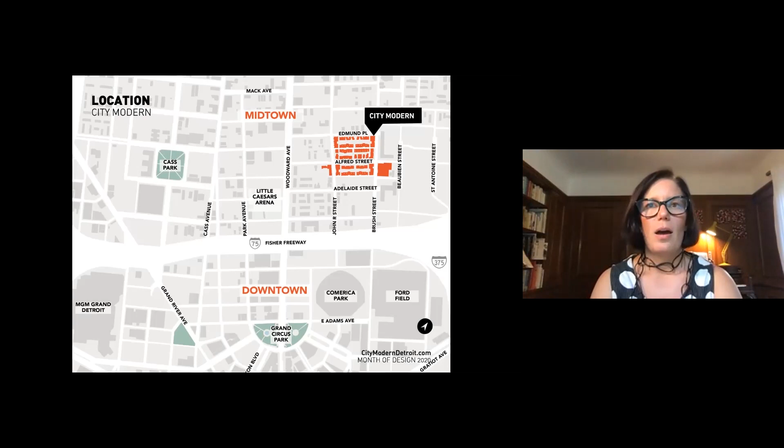Next slide, please. The 8.4 acres had 4 existing historic Victorian homes on them. But the historic Brush Park neighborhood is a well-known historic district that at one point had over 100 Victorian homes in it. It's now down to about 40 Victorian homes.

It was important for us, as we were thinking about how to design and construct new buildings within that neighborhood, to ask: what does it mean to design new buildings within a historic district? Next slide, please. When Bedrock was answering the RFP, we looked at everything, including what it means to design within the Secretary of Interior standards: the work shall be different from the old, but shall be compatible with the historic buildings in the neighborhood.

Next slide, please. We did additional research and looked at what that meant in order to do new buildings that were either fully contextual with the buildings around it, abstractly contextual, or anti-contextual. That ranges from everything from mimicking the historic all the way to doing something so unlike the historic, and anywhere in between.

Next slide, please. We also looked at the Brush Park Historic District. They had spent a lot of time putting together a really thoughtful document that outlined the 18 elements of design for architecture and for new buildings to be put into the historic district.

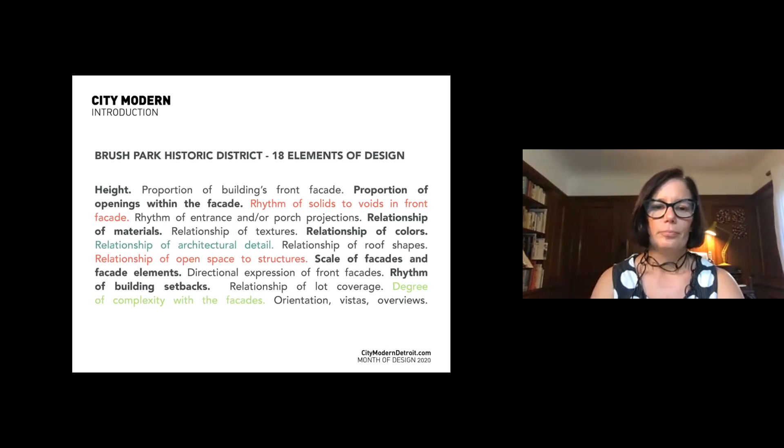Next slide, please. So for us, for Bedrock, with one of our very first new construction development projects, we had to think about what it means to design new buildings within a historic district in Detroit in 2016.

Next slide. We looked at the timelines of historic Brush Park: when the buildings were built, when they were divided up into smaller buildings, the storied history of some of the demolitions of those historic buildings. But we also looked at Detroit and the significance of design within the city over the past 100 years, running in tandem with Brush Park's timeline.

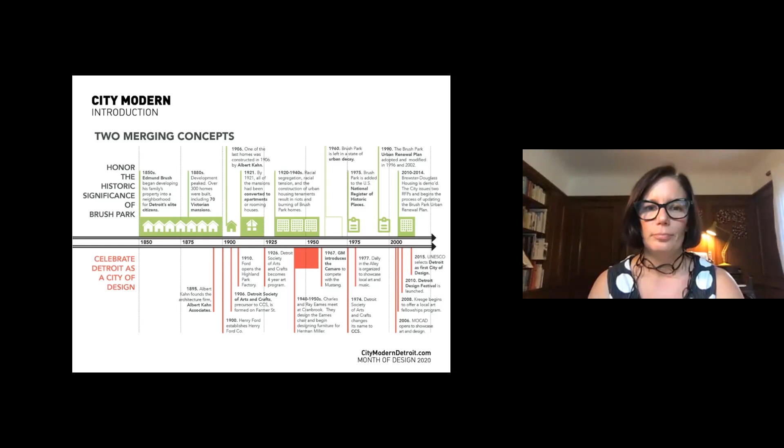Next slide, please. And then we realized we were at a moment, we are here in 2016, so that's almost 5 years ago now. We realized we needed to both honor the historic significance of Brush Park. Next slide.

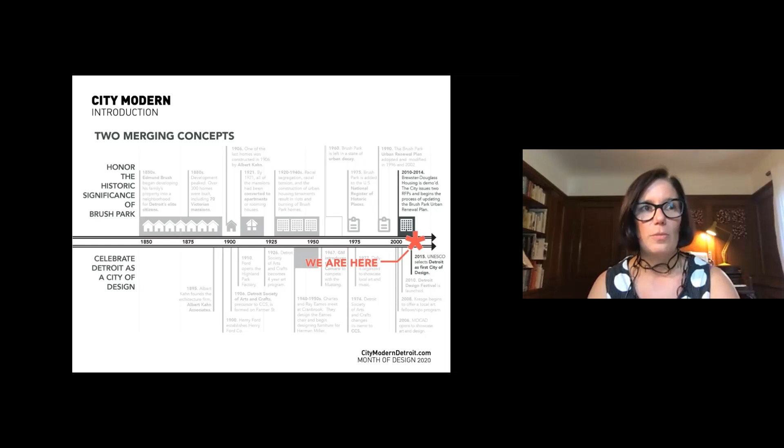While also honoring what design means to Detroit, our project approach celebrates Brush Park's past while designing contemporary architecture emblematic of Detroit's time.

With that approach, we realized we needed to hire the best master planners, so we hired Hamilton Anderson, a local architecture firm represented here tonight, and Betsy Williams is going to speak about their work on this project.

We knew we were going to have 5 different typologies within the project, so we looked for the 5 best designers, some of whom are here tonight, to talk about their projects. It was important that we found designers who had done similar work, designing new contemporary architecture within historic districts.

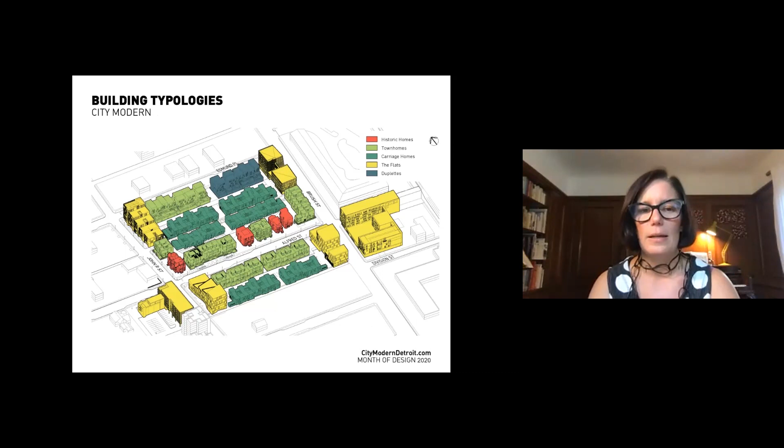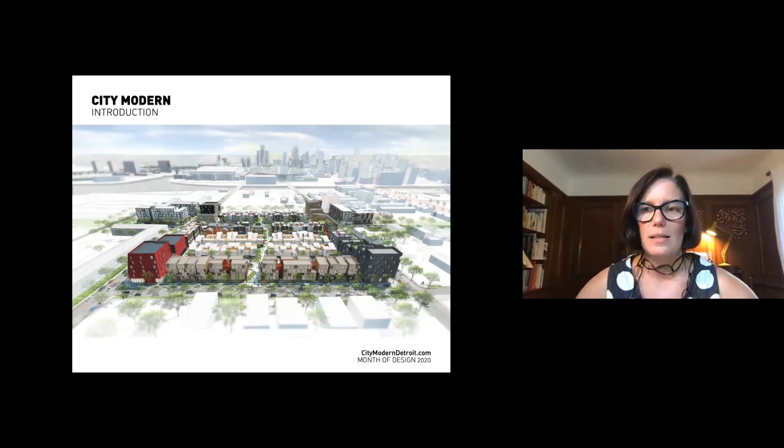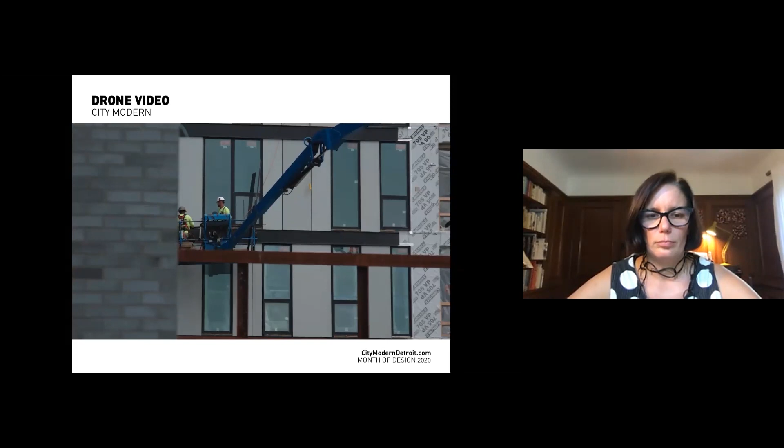This is a video that gives you a real-time look at the construction efforts of our project out at City Modern.

Tonight we're going to focus on an explanation of the planning process that we went through, and also 3 buildings that are currently under construction or about to open or have opened in the City Modern project.

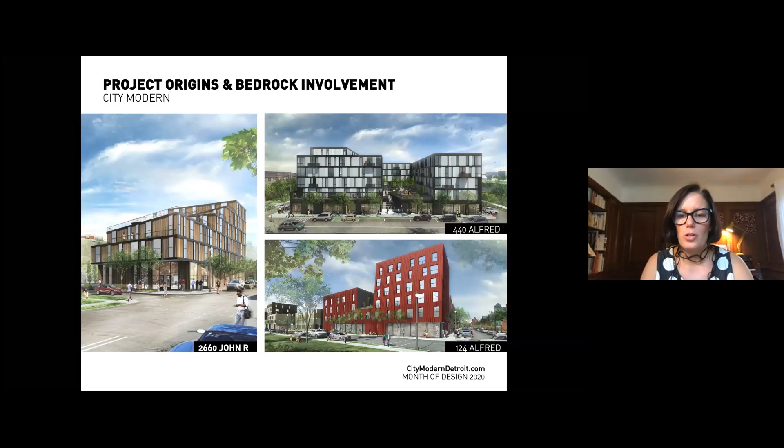We also have a community aspect here with one of our near and dear friends, Mona Ross Gardner. She is the chair of Brush Park Community Development, and she's going to talk about the community engagement aspect of our City Modern project over the past 4 years.

We also have Maurice Cox. We truly miss him in Detroit. He used to be our director of planning and development at the City of Detroit, has now moved on to do great things in Chicago, but was instrumental in getting this project off the ground and almost fully constructed.

We also have Betsy Williams, Director of Design from Hamilton Anderson Associates, and she's going to speak about one of the projects and one of the buildings here within the City Modern development.

And then we have Lorcan O'Herlihy, who's joining us from California today. Lorcan and his firm, LOHA, designed 4 of the apartment buildings within the City Modern project.

And then we have Andrew Bodley, a former associate at Hamilton Anderson, who was instrumental in designing one of the buildings there and now works at Bedrock as a senior project designer. So these are all your panelists.

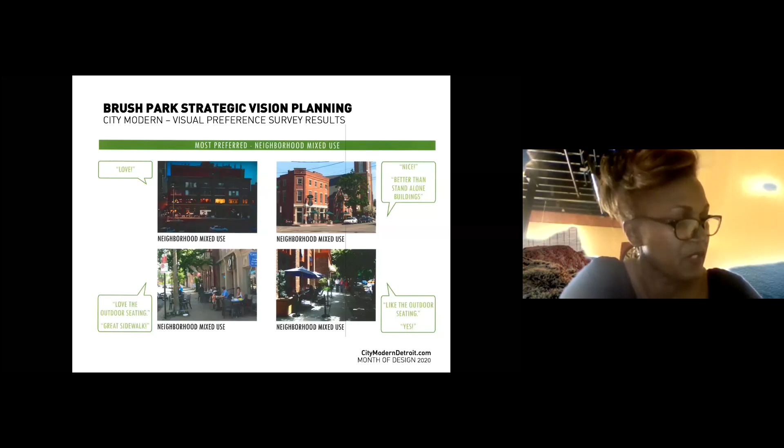When we started looking for another avenue of development for our community, we discovered that the density for Brush Park would only allow for 15 to 35 dwellings per acre. We decided to approach the city, along with Sue Mosey in Midtown who assisted us with this project, to see if we could get the development and modification plan changed to increase the density per acre to at least 60.

I was actually allowed to sit on a panel when the city put out an RFP to find a developer for the project for Brush Park. That's when I met Bedrock, and this young, interesting group of talented architects came marching in. Although there were 9 different groups we had to choose from, they just stood out. I'm so proud that I was part of that project to help bring them into our community, because we've had nothing but success.

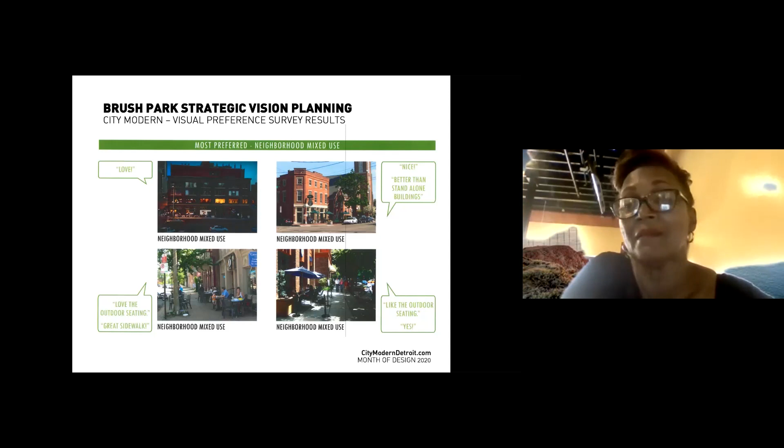We have sat down and became friends. They've been at all of our meetings, they've listened to our concerns, they looked at what we like to see in our community, and by golly, it's happening. It's actually happening. So I want to thank Bedrock for that.

So you can learn more about the Brush Park CDC by visiting our website, www.brushparkcdc.org. The CDC generally meets bi-monthly, so you can visit our website for updates, or reach out to us at hello@brushparkcdc.org. I really do thank the panel for putting this together and allowing community input into it.

They worked very closely with us throughout this whole process. We have been informed of every aspect. We've been invited to all the meetings and been able to participate as they have with us. So I just want to thank you from the Brush Park community and the Brush Park CDC.

Well, Mona, I want to thank you for taking us into your home, which you did by inviting us over for meetings, but also just accepting us into your community. We know as a developer that this community already existed, that the people already lived here and had a strong voice, and we just want to make sure that we are good neighbors and long-term stakeholders as we go into the future.

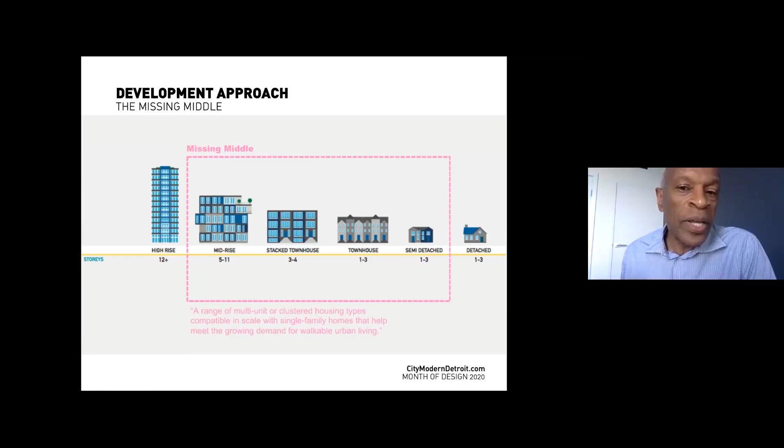The other issue was how do you build a gentle density beyond the single-family tradition that Detroit is known for, and not have the neighborhood populated by high-rise typologies that often scoop up all of the residential power that would otherwise animate the street life. So we were in search of the missing middle—those mid-rise buildings, stacked townhouses, carriage houses—that could genuinely build the neighborhood over time.

And then, how do you do that where you set out a set of guideline instructions for a variety of architects to come in and design singular buildings? So it already introduced the idea of a code of sorts that would be creatively interpreted by a variety of architects in this block and a half.

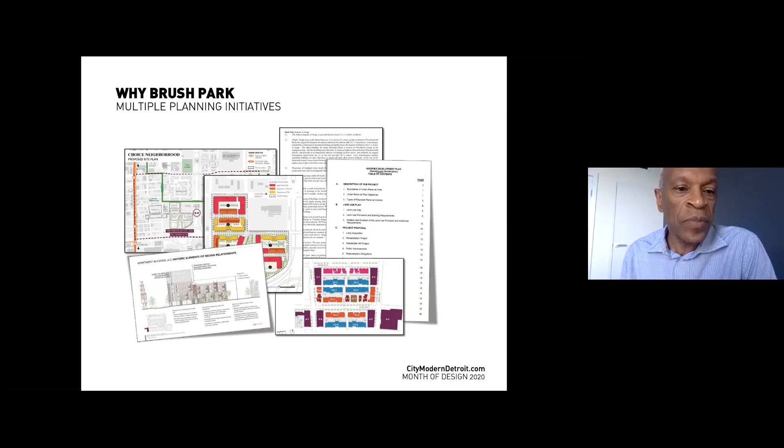There are only 1,900 plus residents today, but we were envisioning what a quarter square mile of Brush Park might look like well into the future. What happens when you invest in a transit system that is literally 5 minutes away from this neighborhood? Does that give it an opportunity to be a transit-oriented development, just like that? Could you conceive of a neighborhood where you would be able to walk within 20 minutes and access all of the amenities that you needed in your daily life, from walking to work, to walking to the corner store, to riding your bike along a greenway, and so on? So the 20-minute neighborhood—my conception of it was born through this City Modern project.

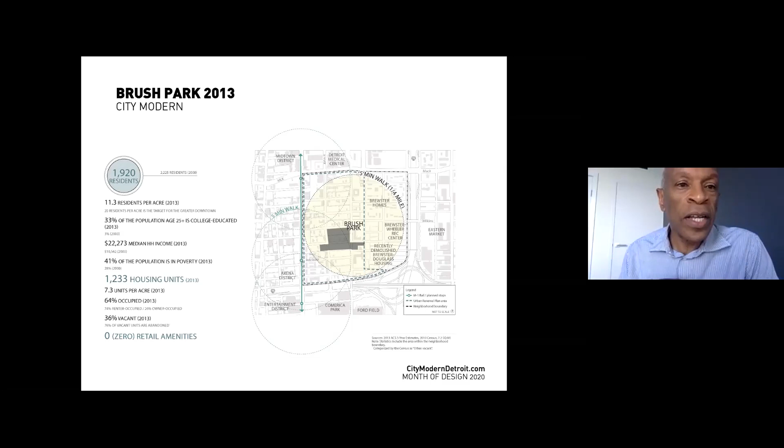And here was the other thing: could we design a neighborhood that was socially, economically, and environmentally integrated, that would be attractive for young families with children, young singles, elderly, and young professionals? Could we really create a mix of units and types that would attract this broadest cross-section of demographics?

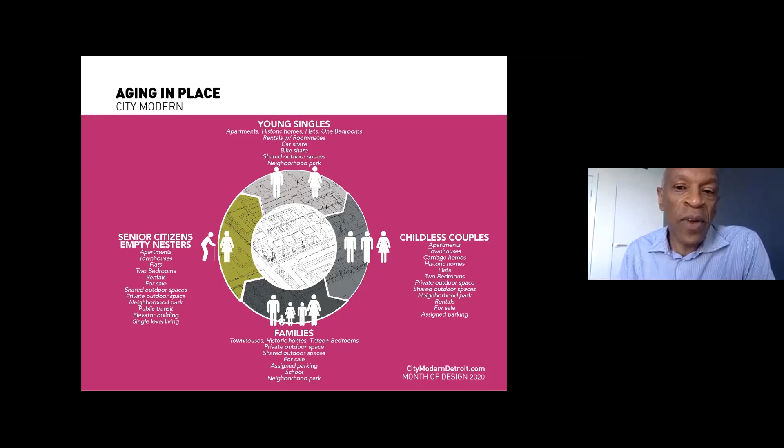Could we build a neighborhood that wasn't dominated by parking lots, but instead allowed the buildings to have a relationship with the street? So you have that traditional eyes on the street, you create porch life, you create balcony life where residents can literally lean over and see who's ringing their doorbell. This attention to the quality and the life of the street was a foundational framework.

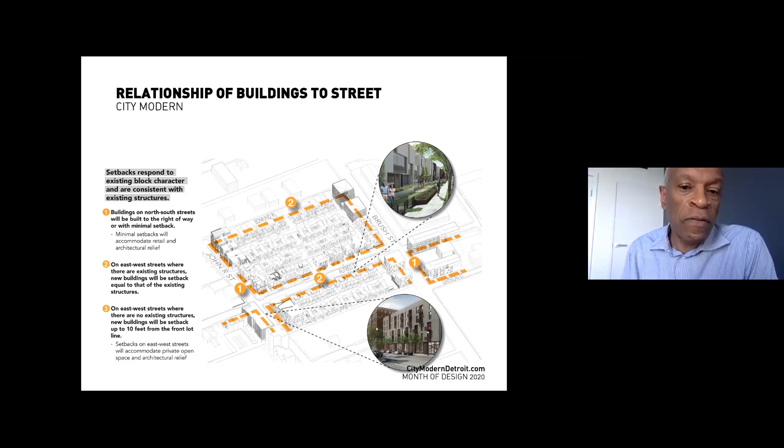And I think, as Mona mentioned, the engagement was continual, and it was the anchor for the success that we see today. I'm not talking about some obligated public hearing, touching base once a month—this was a deep engagement and continual feedback on the design, the form, the typology. It's a lesson to developers that if you want to design a community that feels like the community, you have to engage in a deep process. And that actually could not have been done without the CDC having already firmly been in place, having already put out a vision for what they wanted to see—that gentle density that Mona talked about.

And then, how do you create a cross-section of types, and where would you put appropriate mid-rise density? The decision to orient them north-south and reserve the smaller scale development to the east-west streets is something that is fundamental to the success of Brush Park. I'm pretty confident that all of you have stood between these 6-story buildings and looked at how they frame the downtown high-rises, and you have an instant sense of urbanity and variety.

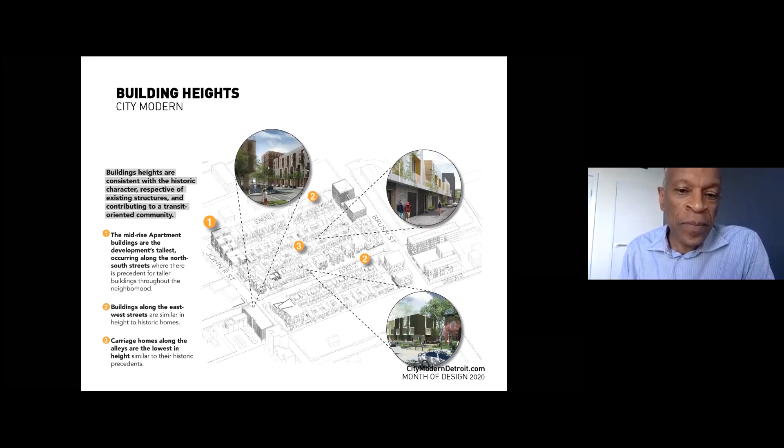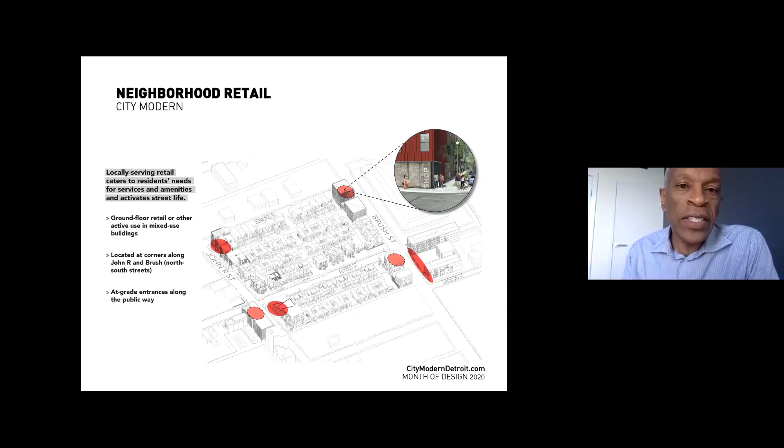And then this notion of the corner store: could we cluster just the right amount of retail on the corner, the way retail has traditionally nestled itself into predominantly residential neighborhoods, that again animates the street life and creates this 20-minute neighborhood where you can get your amenities within the neighborhood you live.

And this notion of an alley, but not just an alley for cars—an alley for people. Could you create an alternative place that gives those who live there a sense of security, a place where kids could play, where you can hang out and talk to your neighbor over balconies, so that it genuinely becomes a pedestrian street that occasionally has cars tucked in under the units.

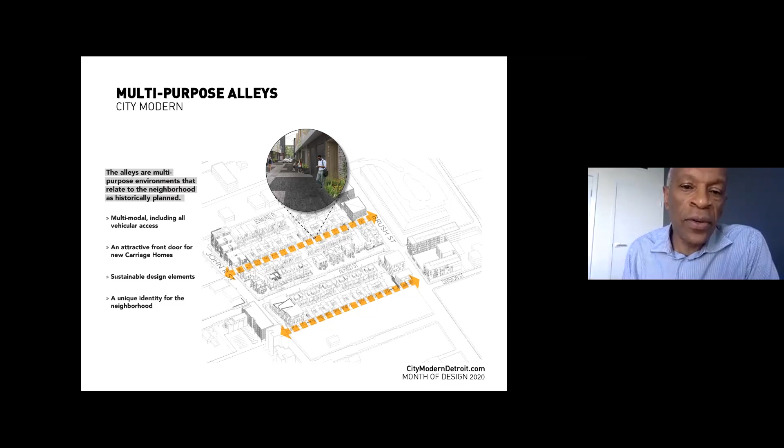This one was a really important innovation: this notion of how do you create a collective space within a hermetic block. Traditionally you don't invite the public into the interior of the block, but this notion of creating a greenway that breaks the block, splits it open, and invites the public to traverse it creates even more eyes on the street. It introduces that environmental issue that takes us beyond the idea of a street with street trees, and literally creates a collective space for all residents, while inviting residents from outside the neighborhood in as well.

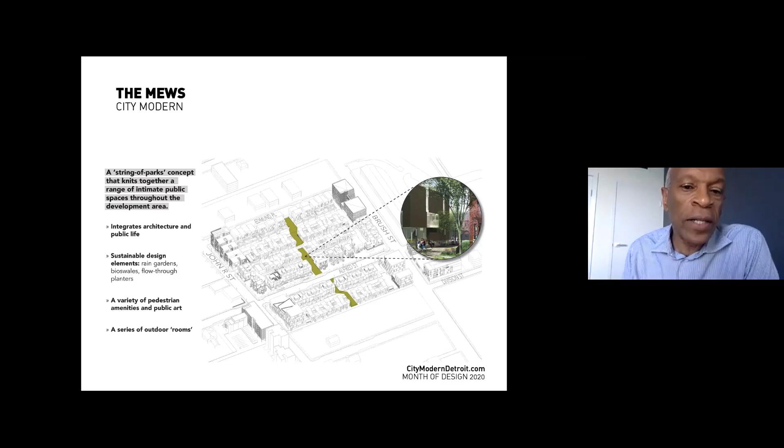And when I see this image, I just feel warmed that this is a city block. It speaks very specifically to that component of space which is unique to Detroit, that we actually have the space to spread out so these kind of green amenities could be part of the block life of a neighborhood. And then the diagram that really sold the committee on this plan...

The idea that we could build a neighborhood that was typologically based, with a variety of options for how to live in an urban neighborhood. We were impressed that there were 6 different options for how to live on this block and a half. These 18 or so buildings with 5 different architects authoring the designs truly begin to imagine what a modern neighborhood over time can look like. We used this study of typology to imagine the entire neighborhood of Brush Park.

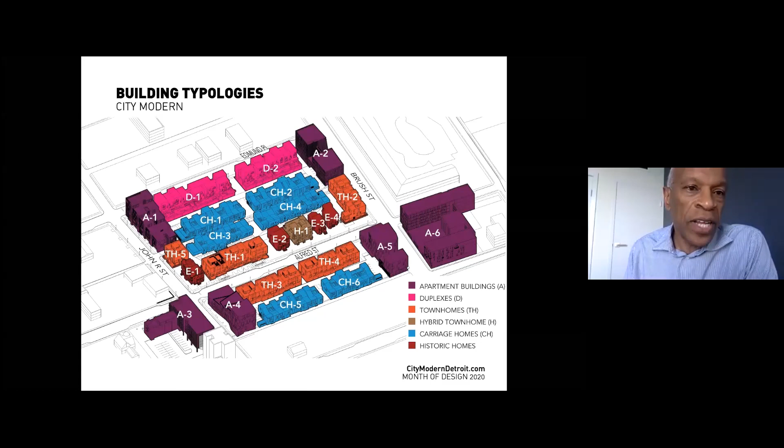What you see in this last version is a series of publicly released RFPs for the vast majority of land owned by the city, mapping out what thousands of units of housing might look like. I'm pleased that after a year and a half, 2.5 years, the City Council adopted Detroit's first form-based code right there in Brush Park.

I would argue that City Modern was our pilot that gave birth to an entire 20-minute neighborhood. So I really thank the team for it. And I know, as you know, we now can see the future, and it is amazing.

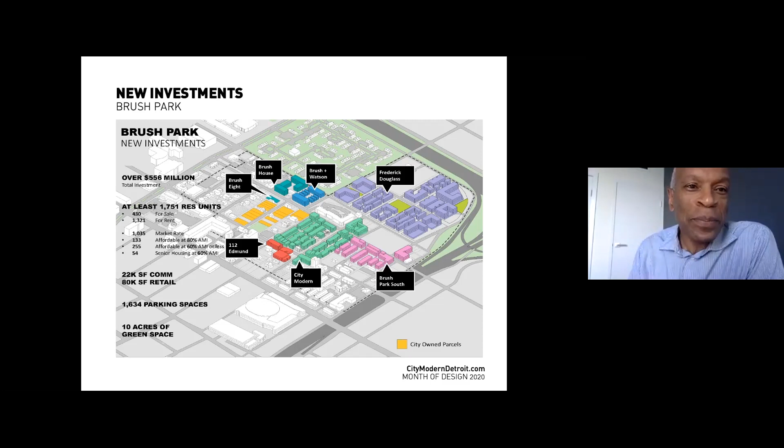Thank you, Maurice. We agree that the future for Brush Park does look amazing. If you think about thousands of new units, that means each of those units is occupied by at least one person, if not multiple people, all sharing their stories within the same neighborhood, which is pretty powerful.

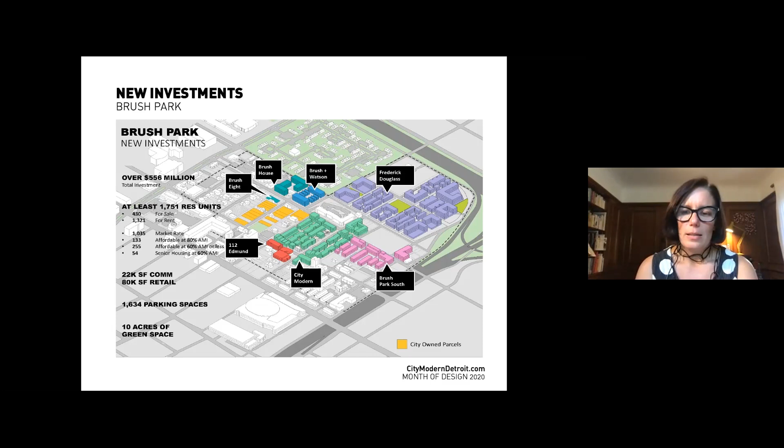Hamilton Anderson is so happy to have had this opportunity to work on an affordable senior housing project, helping Bedrock realize their vision for this. I think we can all agree this is an urgent need, and we need to do more of it. So we loved working on it, and I'm excited to share it.

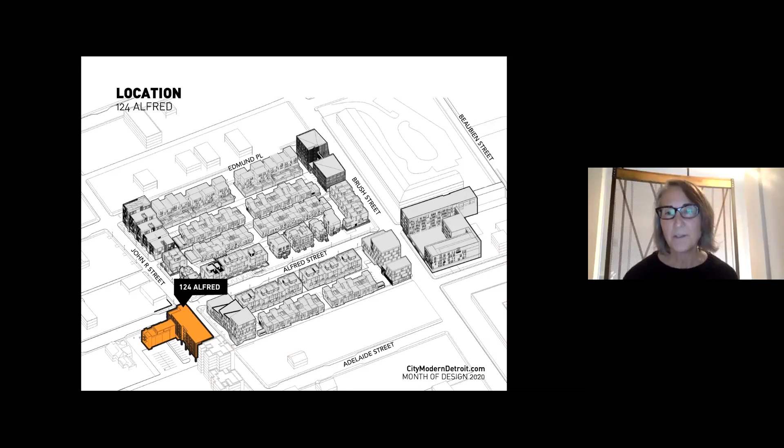So you can see where it's located, in the southwestern quadrant of this development. Now we're going to reorient you and look south so you can get a sense of the proximity to the city, the strategic location this building has along a major thoroughfare of north-south John R, and east-west Alfred, Alfred being a more residential street that we have some responses to, which we'll explain next.

But first, let's do a couple of facts: 5 stories, 81,000 square feet, 54 units. A key tenet to this as a senior housing project is actually to provide active and engaged living opportunities for people that are 55 and up.

And so that actually means connecting with the neighborhood at large, as Maurice has described, connecting with the amenities within the development, but then also within the context of the building, forming connections, allowing people to have community space, but also these places in between - the corridors, the stoops, the balconies where people can be part of a community.

We also followed the Enterprise Green criteria, which allowed us to do a number of interesting things, among them work on cardiovascular health through how people use the building, and work with Bedrock to make sure that the building is sustained, managed, and operated in a sustainable way, including down to what kind of cleaning supplies you use in the building.

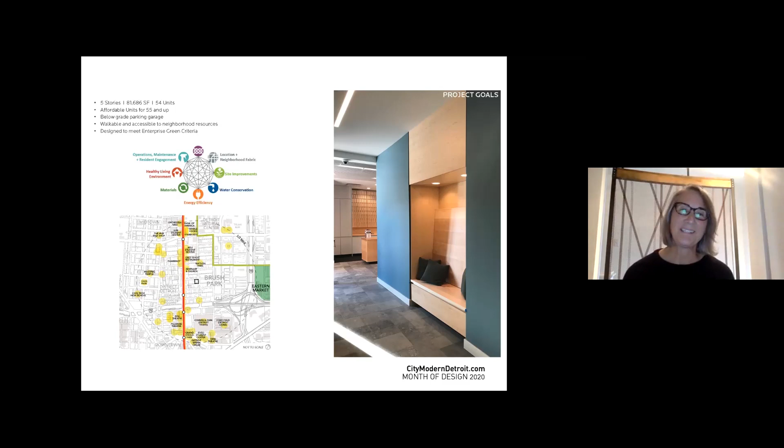Because it is affordable, we also had to make it a project that we could build under the budget that was required of it. So we set about to have a fairly simple project, an L-shaped building that wraps a corner, a simple skin with a not expensive material that's well detailed, coupled with the balconies Maurice was referring to. The balconies became kind of the key design feature of this project.

They're inset, so they're part of the unit, and they provide rhythm and scale to the project, but more importantly, they strengthen the engagement between that person's unit and how they engage with the street. We also looked at the context of the historic buildings and also the context of the other architects and their work, because that is the new context that was being formed, which we can look at a little more next.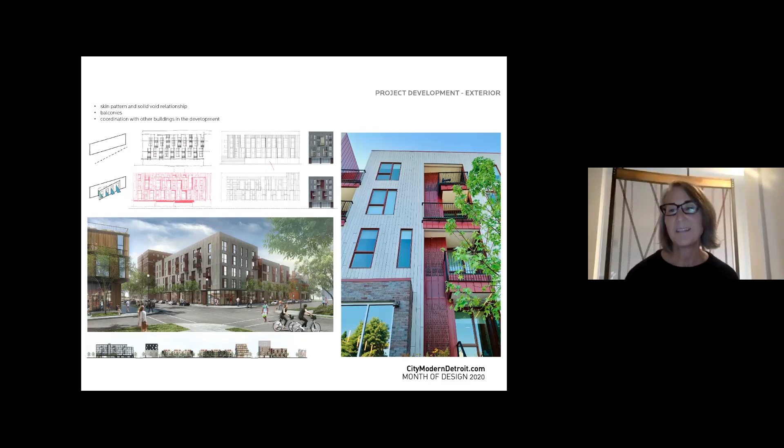Here's an overall view of that corner, scaled in a little. Again, we're at John R and Alfred. We have retail at the corner, which speaks to some of the tenets of the project, and we also have strategic decisions like an entry on Alfred Street, marked with the little number 1, because that's the residential street.

That's where this residence should be entered. A little more detail about Alfred Street, because this is a very key part of the project. As we wrap that corner, you can see how the building is taller and then begins to step down, relating much more to the residential houses, historic ones, particularly the one right adjacent to it on the right. This came about through good thinking and talking, and working hard with the actual neighbors next door to this site.

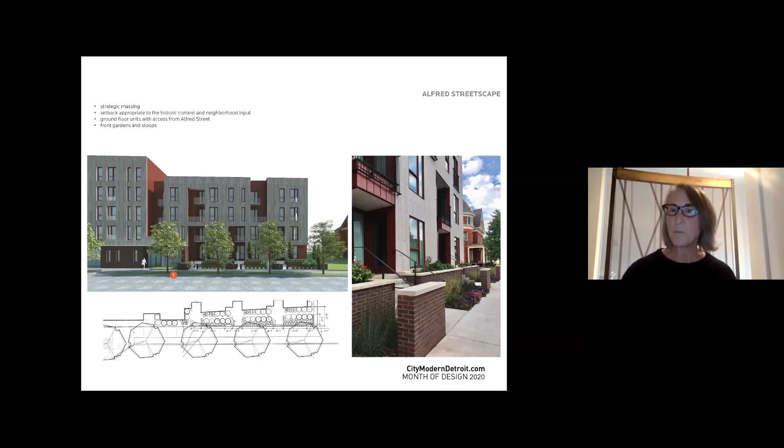And then just the nature of the history of the street and how buildings sit back on those residential streets. Within that space of the setback, we were able to provide front steps and gardens, essentially stoops, to those walk-up units that are part of the whole apartment building, but have this distinct and special advantage of being right on the street — connecting even more to the neighborhood that we're speaking of, and so excited about.

I'll quickly go through some of the program. The reception is right there when you walk through the door — very open, accessible. The offices are right there, so people can make connections with what they need here in this building. Retail is on the corner, which contributes a lot to the activation of this whole community, but is also very convenient to our residents.

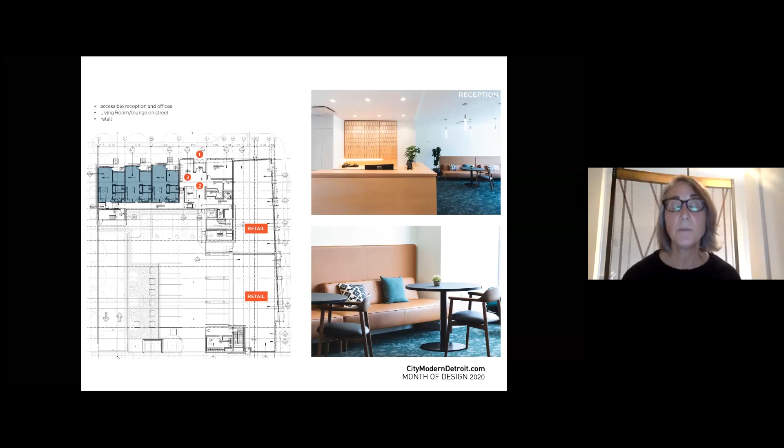There's an overall strategy, an L-shaped building with retail on the major thoroughfare. This L wraps a parking court, essentially parking below deck, below grade, also some tuck-under parking. That wrapper also contains residential units that form almost townhomes on the street. All of this is softened by a garden in the parking area, but also to provide healthy and communal opportunities for the residents here.

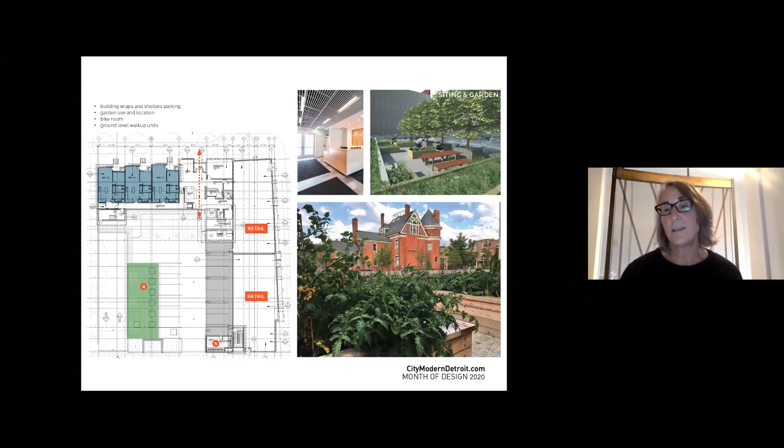I mentioned that typical unit that's on the ground floor facing Alfred Street — that's really the workhorse unit of this building. There are a few special units, but primarily it's a 1-bedroom unit, and primarily they stack as you would typically do in most projects.

What we tried to do here, in one place at the break point between floors 3 and 4, we flipped just 2 units. By doing that, as the diagram shows, you start to get a rhythm and syncopation that isn't usually possible. With this subtle little move, we feel we achieved a lot of the rhythm and joy of the project we were aiming for, on a budget.

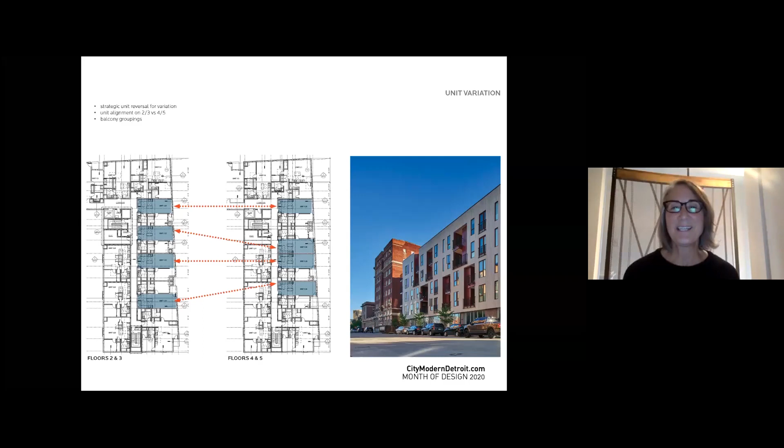I'm going to quickly show you a couple pictures of the model unit. This is a model unit that was staged, and obviously everyone's unit will look different than this, but this is how it all began. This is a unit on the corner on the 5th floor.

Let's go to the next slide so we can see some views of that unit — wide open space, long and narrow, but well lit, with views of the city.

And then amenities that you would hope to find that allow people to live independently and actively: their own washer and dryer, accessible bathrooms, and simple, well-lit rooms in a palette that's purposefully neutral, so that when people move and make this their home, their belongings become the decor of the place. That was something we were striving for.

The top floor also has the bulk of the community shared activities: an exercise space, an indoor community room, a great deck where you can see north, west, and south, fireworks, everything. This 5th floor, massed only on John R, allows us to have that tall piece that then steps down and gives way to the opportunity for that deck.

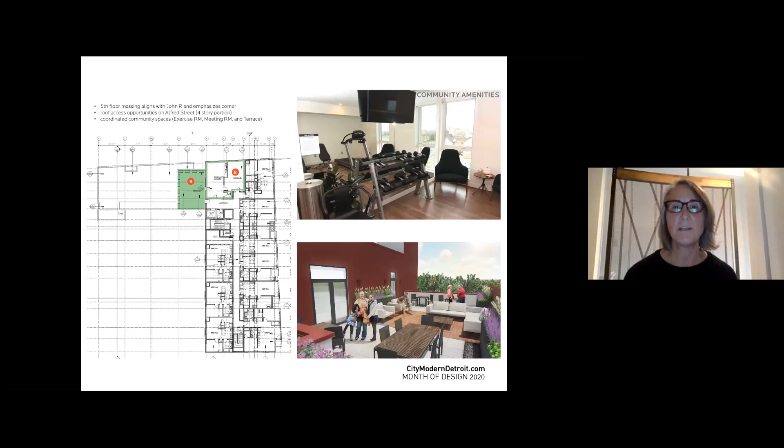We've made it to the top — there's our building one more time. I just want to say one quick word about something we enjoyed in our office, which was the acceptance that we would use an all-in-one Magic-Pak unit to heat the units. That's an affordable thing to do, and we were committed to making sure that became not a problem, but an aspect of the exterior.

So we worked very hard on the screening, did a lot of testing to see the best screen option possible, and then applied that with other details to the facade. The mantra we had in our office at that time was 'magic happens.'

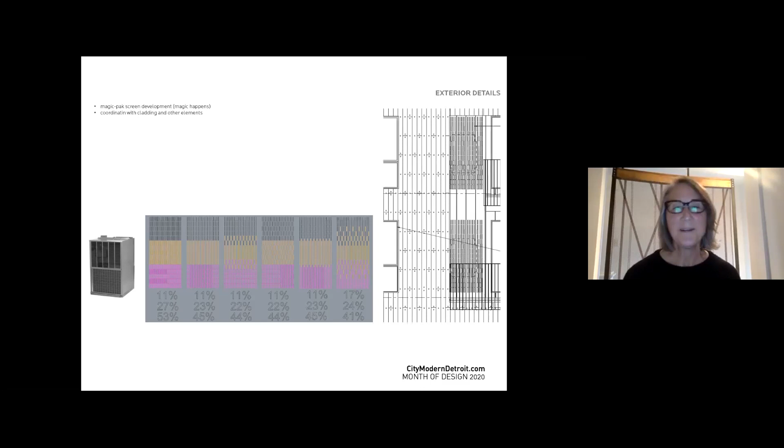And here's our final view of this project. This speaks to something we're hoping the building continues to grow toward, which is the occupation of those balconies, how people use them, how they communicate across them and above and below them. I think the one balcony in the middle, you can kind of see how there's a balcony within a balcony, so those people almost share the same porch vertically, which we think is kind of fun. So that's the story for now. I look forward to your questions, and let's talk about the building to the right.

Thank you, Betsy. I just can't thank you enough, you and Hamilton Anderson, for your passion on this project, proving that affordable housing and senior housing can be beautiful and also sustainable. Betsy was the sustainability champion for this project, proving that you can have all of it, and that is proven by the current occupancy rate, which is almost full. The building is almost full. So all great things came together.

Our next panelist is Lorcan O'Herlihy. He is coming to us from a beautiful California afternoon, all the way from the West Coast, where he's the head of and founder of his firm, Lorcan O'Herlihy Architects. Lorcan, do you want to tell us about 2660 John R., please?

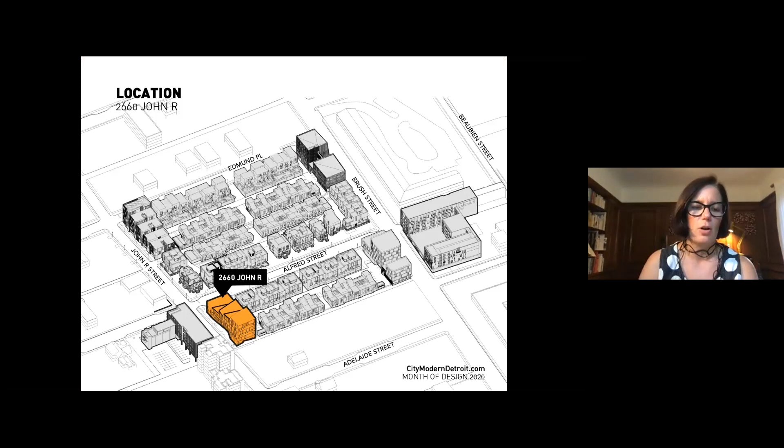It'd be a pleasure. Hopefully you can all hear us. Great pleasure to be invited to be part of this wonderful experience. We did see this project as an opportunity to further expand the idea that can a building be more than simply a building? Can it be woven into the city life that it's placed?

And that's key to quite a bit of our work. We drive all our work based on engaging the community and the culture where it is. So we imagine that this new complex could allow life to spill into the streets and infuse a neighborhood with life and activity and energy and dynamics. Cities have to have that to in a way become robust, and that's something very important to us.

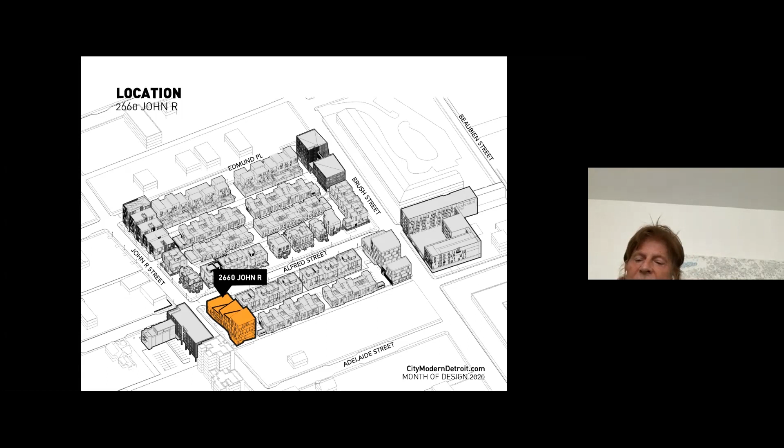But the project I will be discussing, as Melissa just mentioned, is John R. 2660, corner of Alfred and John R. Street. As a whole, the quartet of anchor buildings we were asked to design are variations of a single idea, meant to reflect the low-slung character of the neighborhood. They are designed to add density while valuing the neighborhood architectural past, meaning that the scale, density and proportions of what's around it plays a big role in terms of how we place these projects in the city.

It was key to look at the adjacencies and to connect within the scale and proportions of the building - not only proportions of the building, but proportions of windows and all the other aspects of it. In terms of the step massing, that was key to these projects, so that would allow the building to be more inclusive in a sense, and that's very exciting, responding to, of course, the existing neighborhood.

We took the approach of step massing, so we reduced the scale of the building, so it's aligned with smaller adjacencies, including the Victorian house across the street from the particular project I'm referring to. Each building steps down to the central area and aligns with the townhouses and historical Victorian buildings as well. So that was very important. The big idea was, how do you get away from the 5-story continuous volume, but actually step down so you can activate the different outdoor decks to the street as well. In a way, think of it as a vertical garden, a vertical stepping, which is crucial.

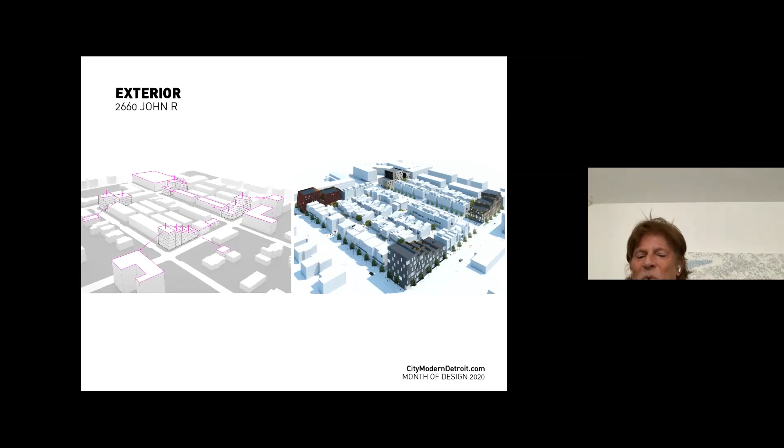The materiality of each building is unique and consistent with locally sourced materials. That's very important. So we are looking at the Detroit urban palette as a driver for what kind of cladding we use on these buildings. We worked with brick, wood, and metal - one of the signature materials in each building. So one was brick, metal, and wood, which is crucial. This image shows the step massing, the balconies, and the unique material palette. That was also key to the whole project.

Very exciting for me was how we juxtaposed the horizontal by orienting the wood vertically. So you have the horizontal and then you have the vertical - the horizontal being the kind of coping you can see on each floor plate, and the verticality of the actual cedar was also crucial. So it has a tactility to the material - you want to touch it, it feels different, and that was crucial. The wooden pieces bring texture. We're playing with the horizontal aspects of it too, which is interesting because sometimes buildings tend to be the same material all 5 levels. We wanted to break the massing down. So, next slide.

Here are more details of the building showing its context, which is crucial. These buildings are part of the city, part of Brush Park, and how it stitches into the neighborhood is what drives all of our work.

You can see the proportions of the buildings. It becomes a scalar issue, which was very important to us. The townhouses and the senior housing are balanced on either side, so the building becomes this mitigating factor between both those buildings.

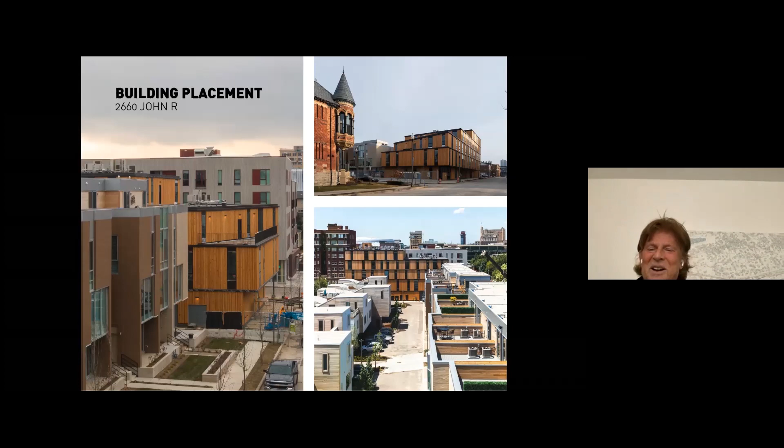There's a mix of units, from 9 studios to 1 bedrooms, and 10 2-bedrooms. The range of size is around 513 square feet at the low end and 1,160 at the high, with the average around 750 square feet.

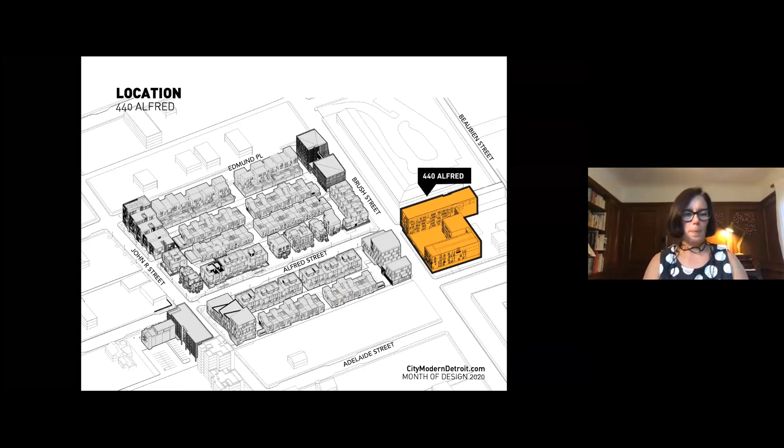Thanks, Melissa, and thanks everyone else for joining tonight. This project's been a pretty major part of my life over the last 5 years, so it's kind of a big honor to be talking about it with you all tonight.

So we're looking here. This is 440 Alfred. It serves as home base for the development and all the rental properties at City Modern. It's 180,000 square feet, 74 residential units with a mix of studio through 3-bedroom units with multiple 2-story units as well. The building houses all the common amenities, leasing and property management, and nearly 130 private parking spaces underground.

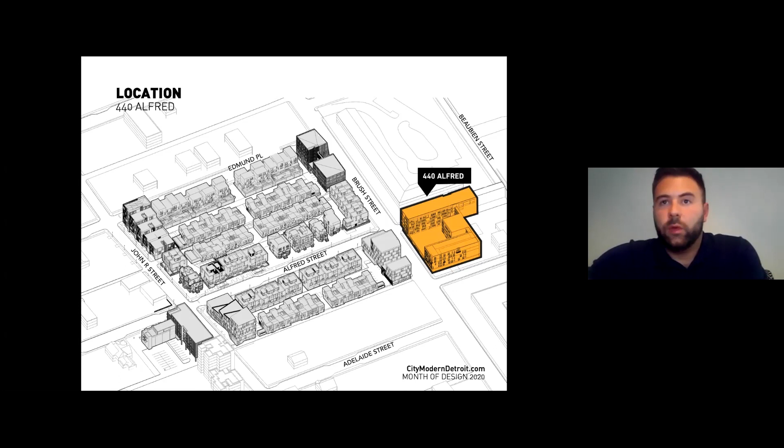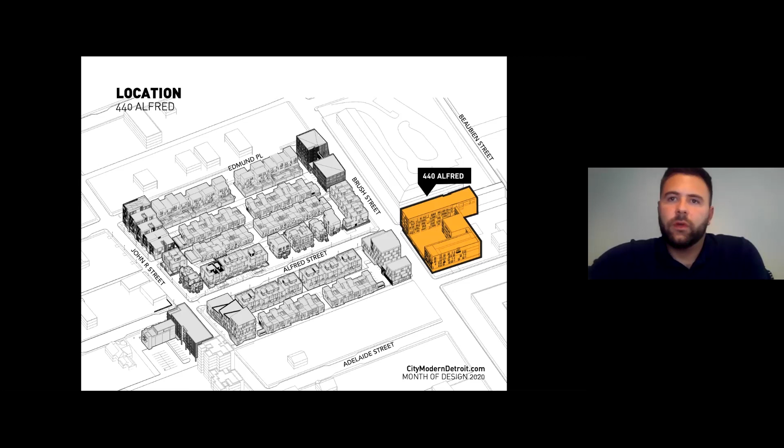The site takes up almost half this block with Alfred Street to the north, Brush Street to the west, and Division Street to the south. Having such a deep site allowed us the opportunity to wrap the perimeter of the site with units and create a raised courtyard for residential use in the center, while also capturing views of downtown and the entirety of the City Modern development. So some really pretty beautiful views. Next, please.

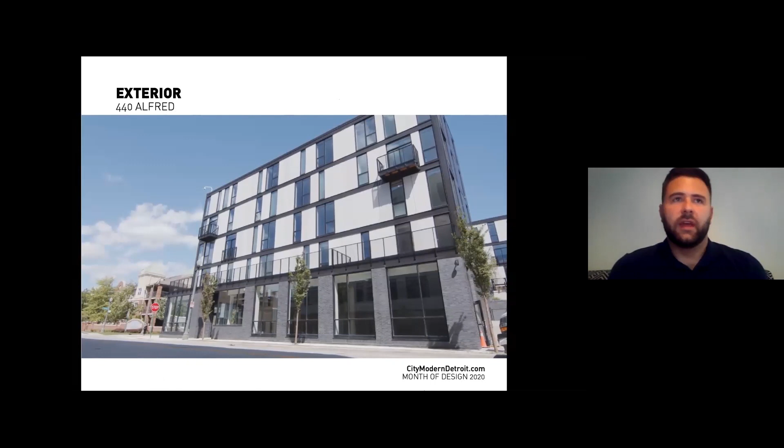So here's a little video of the exterior. We'll talk a little bit about the exterior and the building's massing. It was established with 2 major goals in mind: one, to allow more sunlight into the courtyard by reducing the height of the building along the south and west; and also to break down the building scale at the primary retail areas to maintain street level connectivity. That's something that, as Maurice and Betsy and Lorkhan all talked about, was really elemental in my mind to the success of this project—the connection to the street and maintaining a neighborhood feel, even with buildings that may have a larger scale, especially with it being also a historic neighborhood.

Next, please. So this is an overall elevation from Alfred, the corner of Alfred and Brush. Each residence has either a Juliet balcony or a full balcony. The balconies shift along the elevation to provide more visual interest and minimize the often stacking effect of balconies on top of each other. Large portions of bronze metal panels were also added to bring visual interest as you move around the building.

The mass also you see here at the street level—this is Brush Street, you also see it along the left side of this image on Alfred—steps down to heighten the feel, make it a bit more intimate along the retail corridor. Next slide, please.

So to counter these really large facade elevations, we tried to bring touches of subtle variation in the materials and shifting patterns created by window openings and the vertical panel joints. These panels shift and restart at each floor level, separated by a single horizontal joint, both in the metal panel and in these white concrete panels. Speaking of the white concrete panels, these are all one material but have a little bit different finish to them—some of the panels are sandblasted and some have an exposed aggregate texture, so you can see the slight variation between those two things. The windows toggle between clear and translucent throughout the facade, both to serve as privacy in bedrooms and closets, but also to transform the exterior facade at night with subtle glowing elements.

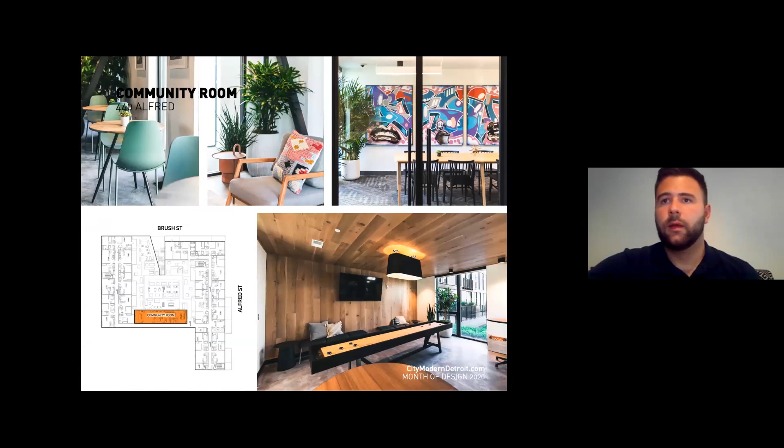Now we'll move up to the second floor amenity space. This is the main community space featuring a lounge, cafe area with kitchenette, flexible dining and conference room, and game room equipped with a really great shuffleboard table. Here's a video.

Designed as the building's primary social space, the community room has direct access to the exterior courtyard. Again, the material palette and furniture add a lot of color to the natural wood and concrete palette. Kudos to the Bedrock design team and Pop House for putting together a really amazing furniture package. You'll also notice a presence of art in a lot of these spaces.

It was really important here and in a lot of our Bedrock properties that local artists are showcased, and I think our team did a fantastic job in the curation and selection of these pieces, not just as accents, but to me they become a real part of the building's design. I'll let this finish out.

Okay, so now we'll go into the unit. This is our model unit, staged unit for the building, which I feel represents a really good majority of the design strategy for each of these units. Units range from 450 to 1,600 square feet, studio through 3-bedroom. We designed these units as a long, shallow footprint with the utilities, bathrooms, and kitchens along the core or corridors to really allow for natural daylight in the living and bedroom spaces along the exterior walls.

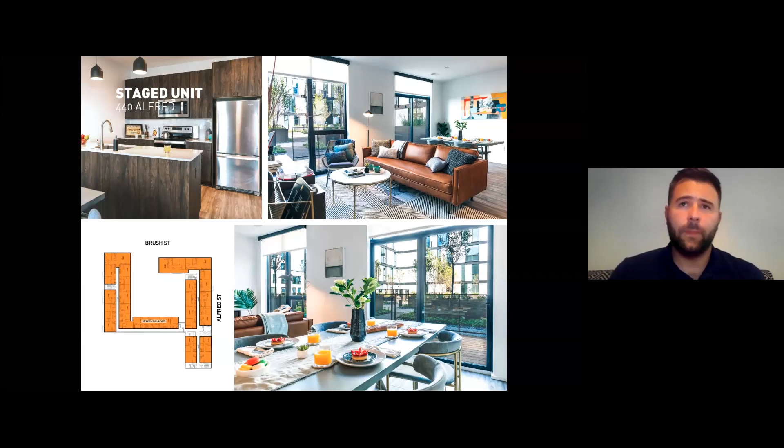See some of the interior finishes here. And we've got another video.

Again, the warmer, natural material palette. We really liked the selections on the exterior, but felt it was more appropriate to do something a bit more warm and homely feeling, with more of a natural feel. Ample windows, floor to ceiling, some spanning 8 feet wide in some cases, really highlight great views of the courtyard, as you see in this video, downtown when you look south, and to the north and west as I mentioned before. Maybe some of the best views actually overlook the rest of the City Modern development.

I don't know how much time is left in this video, but we'll let it run and go to the next slide. Beautiful bathrooms, of course.

Okay, so now to the courtyard. This was kind of the main—I like to call it the highlight of the building. There were two overarching goals for the design of the courtyard. One was to enhance the building's connection to the street. As you see, there's a primary stair that leads you directly to Brush Street, and the rest of the surrounding neighborhood.

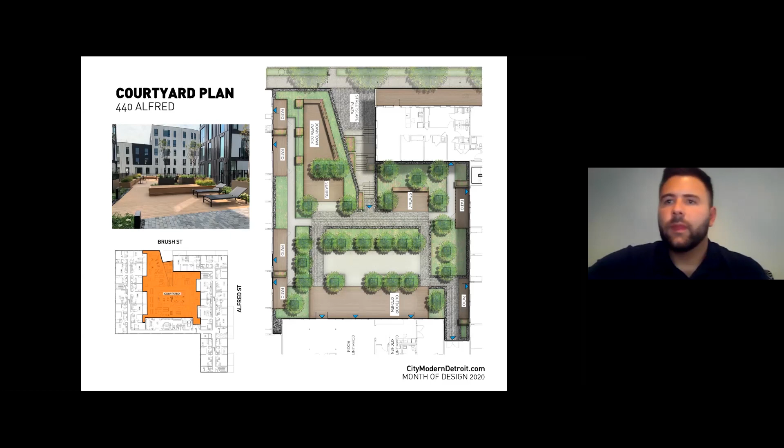Another thing too—you can go to the next slide. Just some examples here of the material palette. This is all done and complete. I think it turned out very well.

Another feature I think that was important was the acoustics. With a number of units facing this space, acoustics and privacy were kind of an issue. So we used over 40 trees and planters, a number of long grasses and green roof, varying in species, density, and foliage.

If we were able to provide residents the option to be social or to sit and gain a moment of serenity in this space, then I think we would call this a success. And I really hope when this building opens, the people who live there find that to be the case as well. That's all I have.

Thank you, Andrew. As you said, it was the highlight of the project. The Courtyard Terrace is probably one of the most beautiful terraces I've seen. What's really nice about this project is that each of these buildings features some sort of outdoor terrace for the residents. But all of those terraces are also lined up with view corridors to the other terraces and nearby buildings, so that you start to get a sense of community even when you're outside, watching either downtown activities like fireworks, or rooftop activations nearby. There's a lot of ways in which all of these buildings across the project are connected together. We talked about views from one window to another, from one balcony to another, from one terrace to another, the porch settings, the streetscapes. It's just a really thoughtfully done, integrated project. And that's thanks to all the people who have worked on this project featured on this panel, and those that aren't on the panel, other architects as part of this project, like Studio Dwell and Merge Architects. So we want to thank everyone for doing their best work for this project.